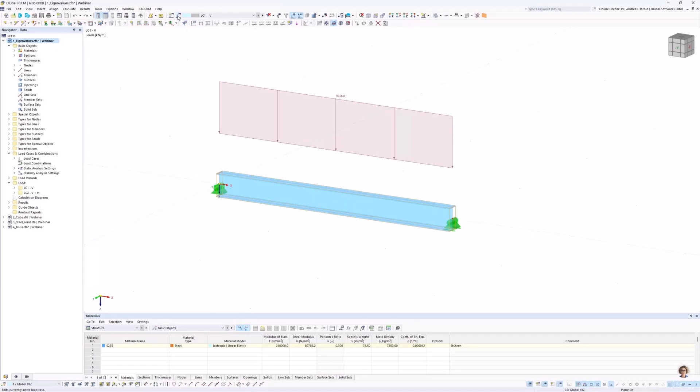Okay, then I turn to the first model and the first question is: I want to determine the critical load factors for a simple model in a structural stability add-on, but I get the error message 'too many buckling shapes required.' Why is that? Let me calculate this load case. I go to the settings before. You can see that 'calculate critical load' is checked with the structural stability add-on.

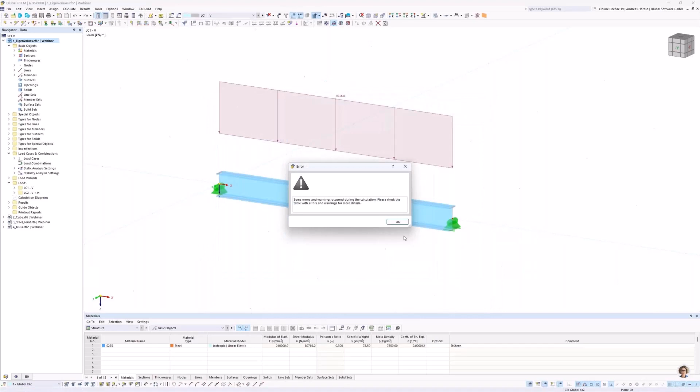Let's go to these settings. We would like to determine the 25 lowest eigenvalues. Okay, I calculate the load case. There's only a load in Z direction. So we see that error message, too many buckling shapes. The reason in this case is that no compressive force occurs in the beam, so the eigenvalue solver cannot determine any buckling shapes.

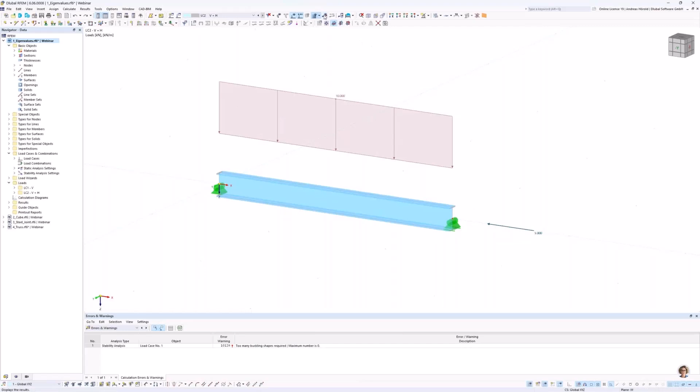Let's turn to the second load case with a compression load. We calculate it. In this case we don't get an error message, unlike the error message for load case 1. We go to the stability analysis, and left above in the results navigator we can see the different eigenvalues. Again, we can go through them.

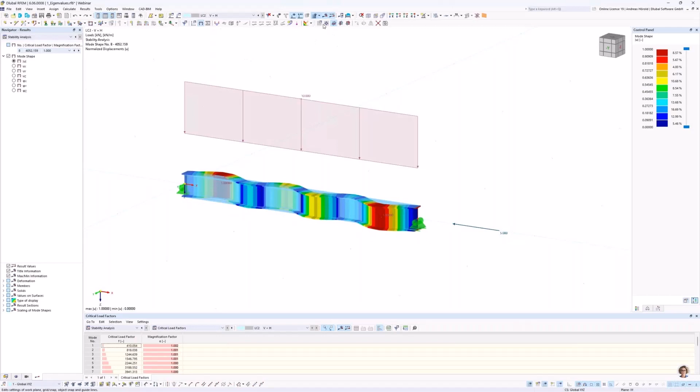But when we go to the FE mesh settings and to the members, there is a member division of 24 set, and we change the value to 2. Okay, and apply. Then we calculate the load case again. Now we get quite the same error message: the maximum number is 14.

Why is that? This is due to the mathematics used in FEM. The global stiffness matrix of the structure has a certain size, which only allows a limited number of eigenvectors, and ultimately eigenvalues. Through mesh refinement, the stiffness matrix becomes larger and therefore has more eigenvalues.

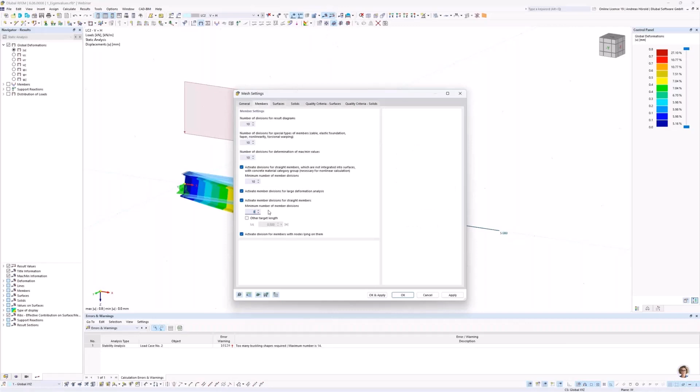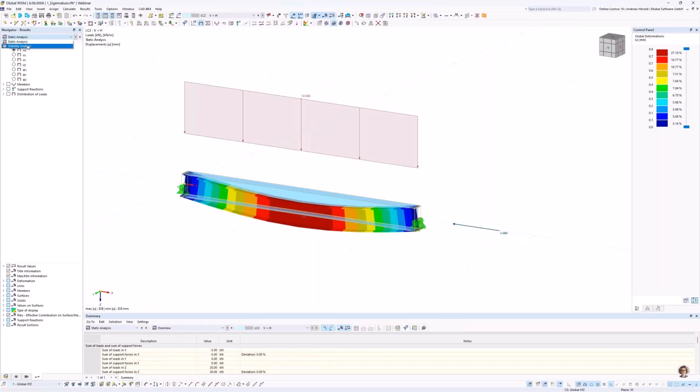Let's change it back again in the mesh settings. I enter the standard value of 8. Okay, and we calculate the load case again. Left above, we change the results navigator to display the stability analysis results, and we go through the different eigenvalues. You can see that it's not a correct or good eigenvalue because of the mesh refinement or mesh setting of this member.

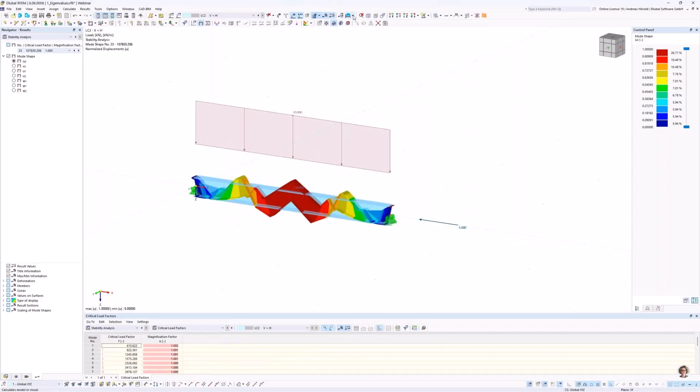I would change it back again. Sorry, here, mesh settings: 24. Okay. So after the calculation, it should look better.

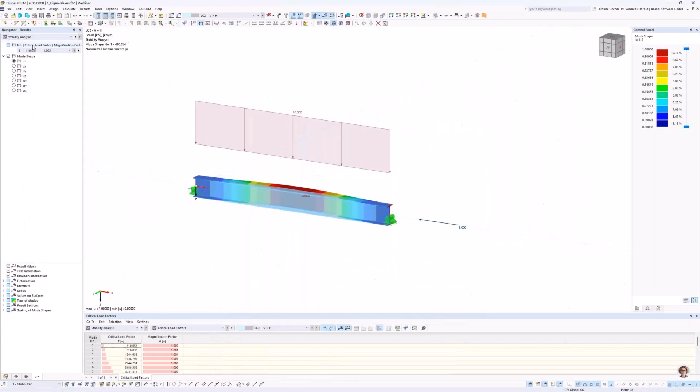Here, as in any FE calculation, let's go through the eigenvalues. Those eigenvalues look quite better. As in any FE calculation, the principle applies that the FE mesh should be kept as coarse as possible, but at the same time as fine as necessary.

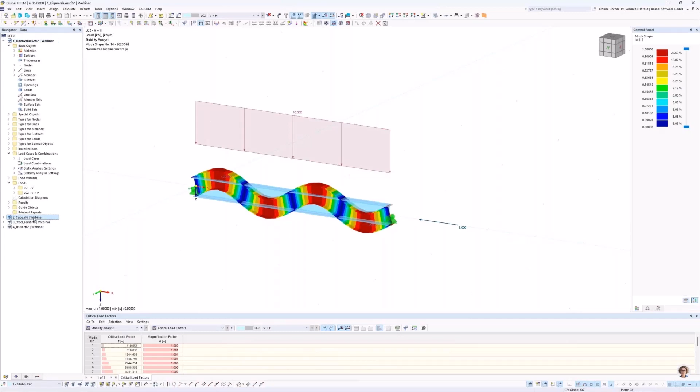Okay, so then we turn to the next model and the next question. The next question is: how can I quickly and easily insert an opening in a solid body in RFEM 6? Now, the basic shape here is a cube. We now want to insert a rectangular opening and a rectangular pocket into it. So we change the work plane into XZ.

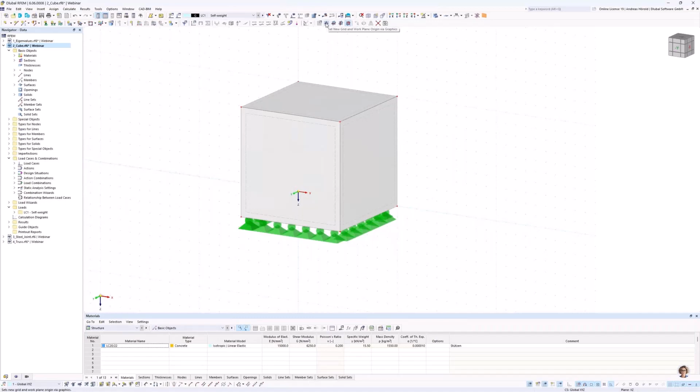With that button above, we set a new grid and a new origin. I click on that edge, so now the front is our work plane. I change to the -Y view.

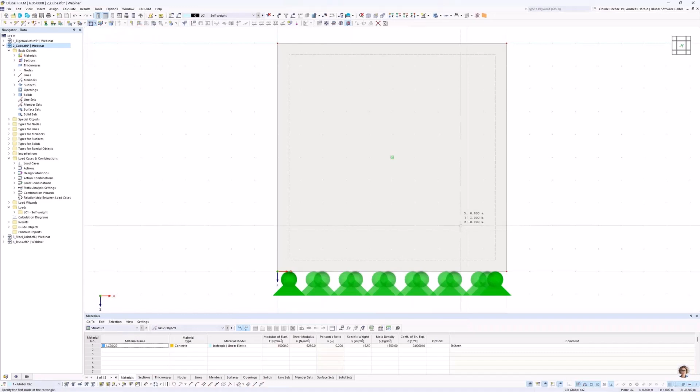So we start with the rectangular opening left above. I enter the opening, and then I would like to copy that opening.

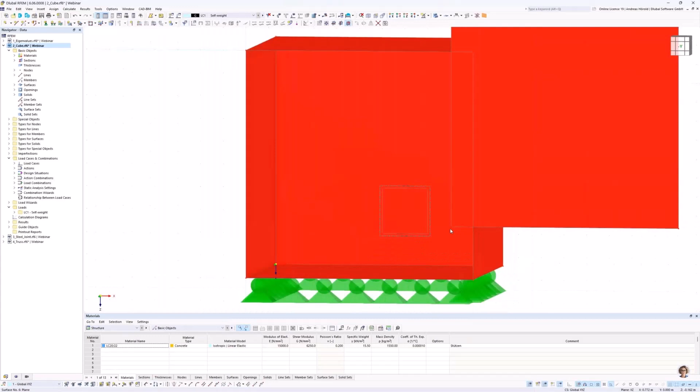Just a small tip: I would like to enter a window around the opening. And when I do that, I destroy the cube, or I drag and drop the surface. How can I avoid that?

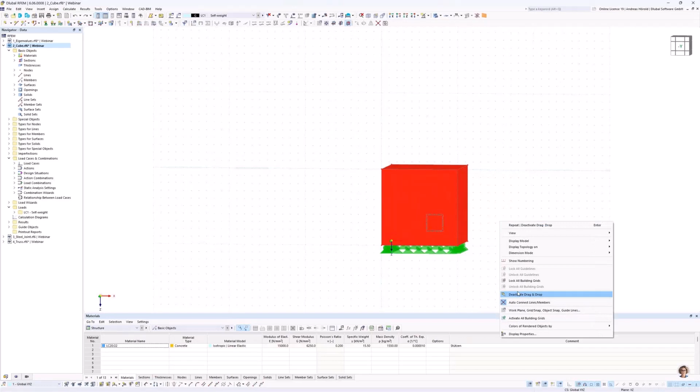I undo that. With a right click in the empty user interface, I can deactivate the drag and drop function, and then I can select the opening. Or the other possibility: I change it back, activate the drag and drop, and press the Alt key, and then I can also deactivate the drag and drop feature for this time.

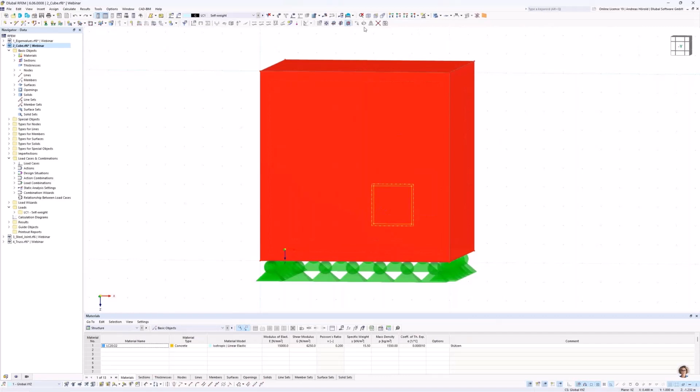Then above, move copy selected objects. I create a copy. The displacement vector should be from the front to the back. I activate the step links.

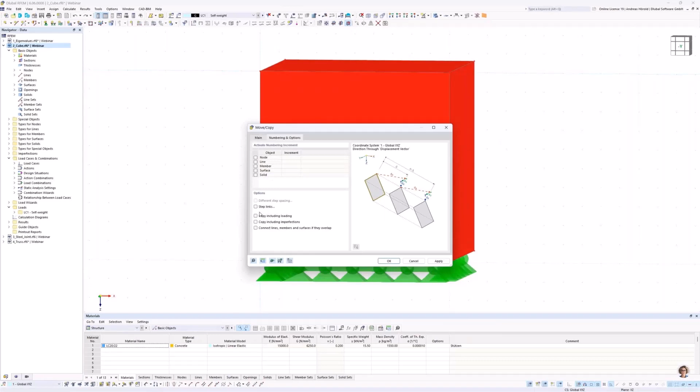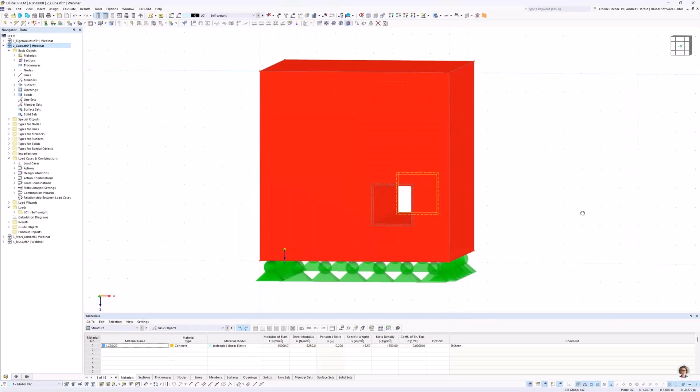Then I select link nodes with line, and link line with surface, and I have to select the surface in the graphic. I select this one. So, and that's all. And now the opening is created.

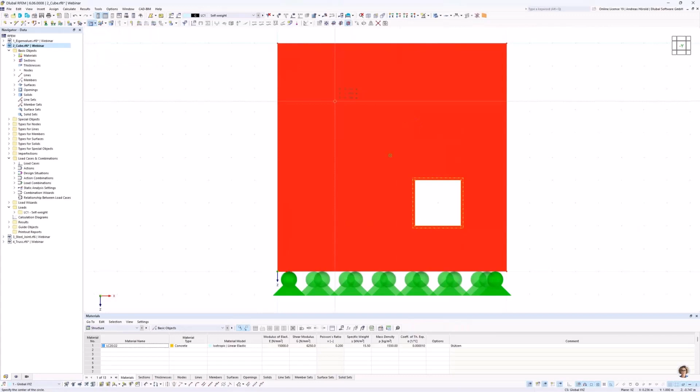So then we continue with the circular pocket, or rectangular—we do a circle. Let me search the grid. So, that's the opening.

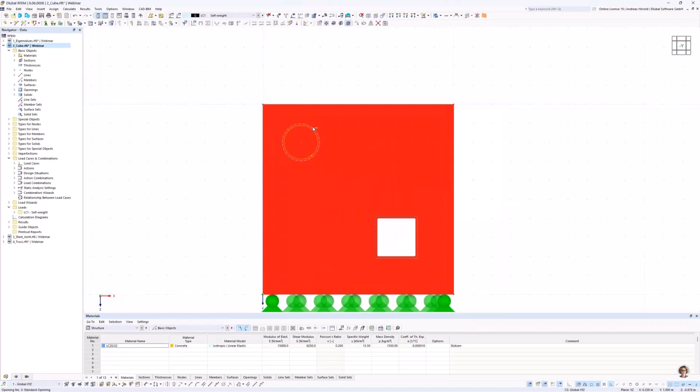Now I select all, but not the opening. I press the Shift key and deselect the opening. I would like to copy only the line, so go back to Move Copy Selected Objects. The program remembers the last entries.

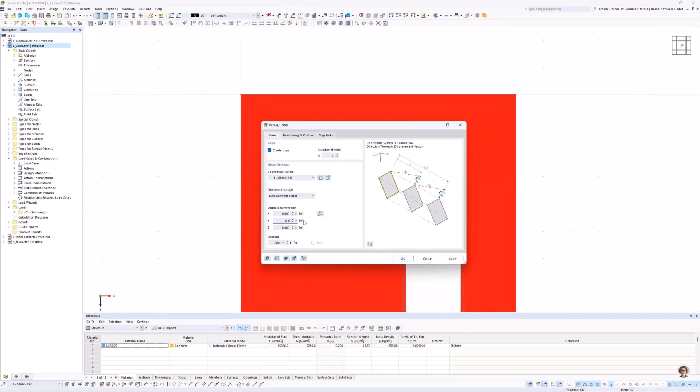So I enter 0.8 here and leave the settings for the step links.

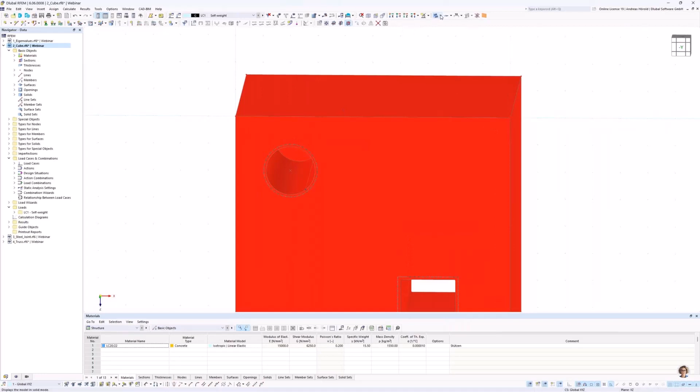Now only a circular surface is missing. I switch to the transparent model, or better to the wireframe model. And you can see there's no surface here.

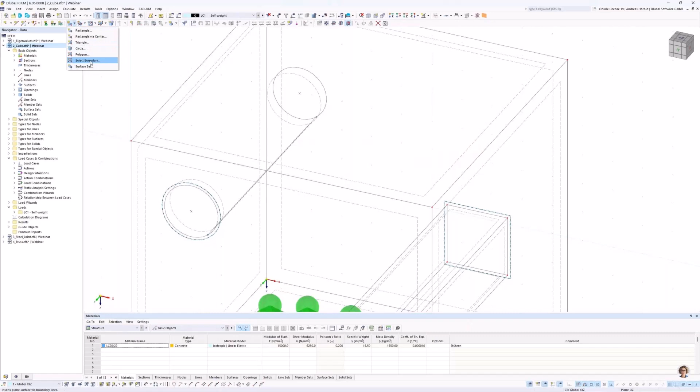So that's why I select the boundary lines and create a surface. The stiffness type should be without thickness. I select this line.

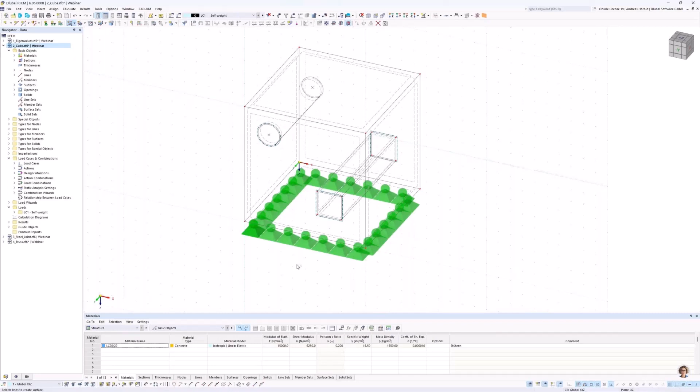So that should be all. I can go back to the transparent model. On the left side in the navigator data, you can see the solids, and now it's in red color. The solid is not closed anymore.

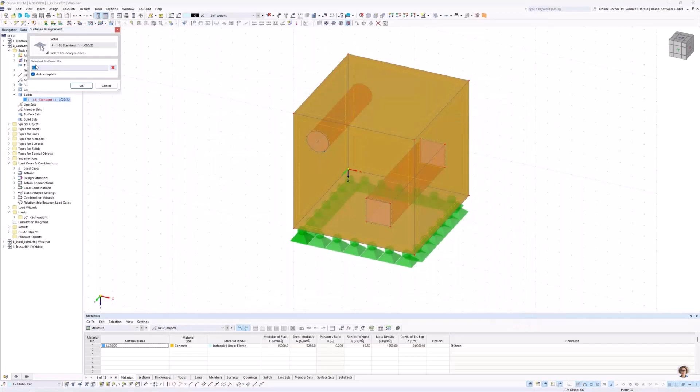So how to correct it? I double click on the solid and I have to select the new boundary surfaces. So I clear it, and select all. And now all is correct again.

We can mesh the cube. Now the solid is complete, and we could calculate it.

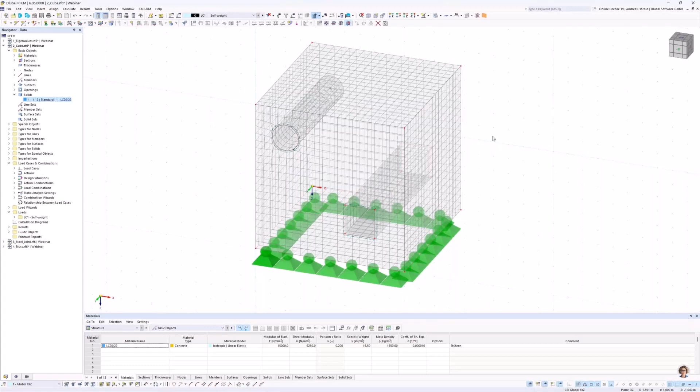Okay, then we turn to the next model. That's a simple steel connection, and the question is: I have modeled a steel connection and would like to include a dimensioned sketch of it in the printout report. How do I do that?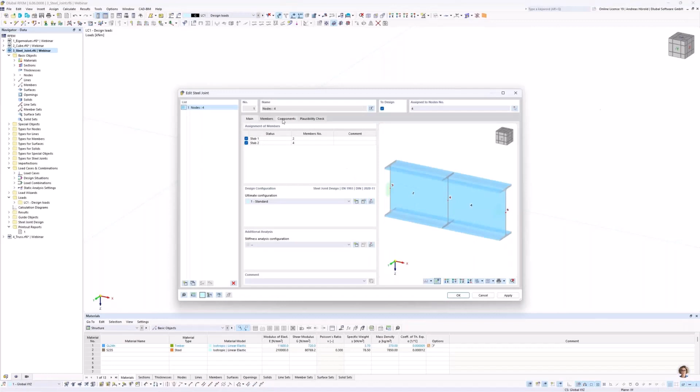I double click on the steel joint. I can see the components. So, let's go to the view in -Y direction—no, in the X direction.

And now we want to dimension the screw spacing. Now that's a quite new and often wished feature. So I do a right click in the free space, and then I can enter new dimensions.

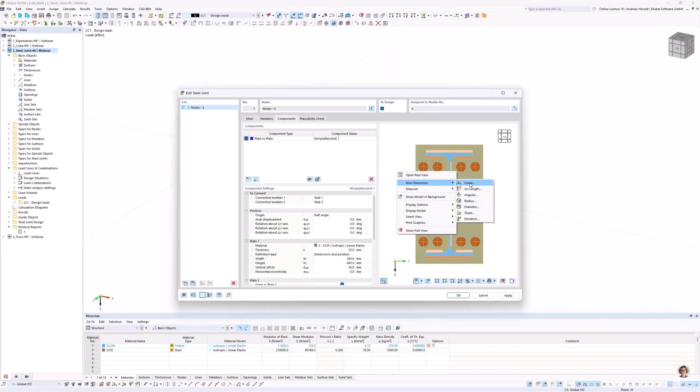Can add linear dimensions, angular, radius, and so on. I create a linear dimension, so I click on the edge and the middle of the screws. Then I choose the projection in Y direction and second plane.

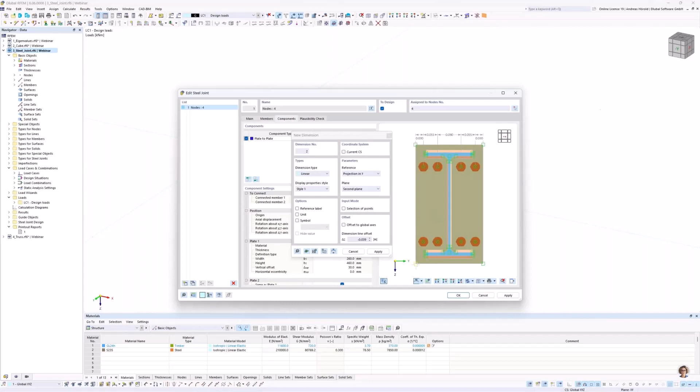So then in the next step, also the vertical dimensioning: projection in Z and first plane.

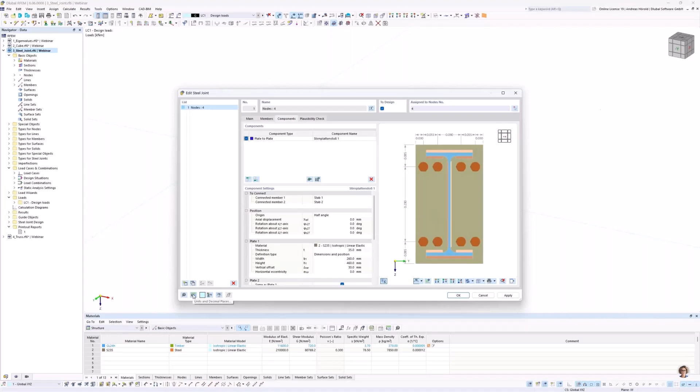Now the dimensioning is in meters. I would like to change that to millimeters. I go to the bottom left to the button units and decimal places, then to dimensions and change it from meters to millimeters, and change the decimal places to 0. Okay, that looks quite good.

We save all with the apply button, and now we can print that graphic in the printout report. You can print it directly to the printer and so on, but I print the graphics in the printout report. Now that's the preview. That looks quite good. I change it to window filling.

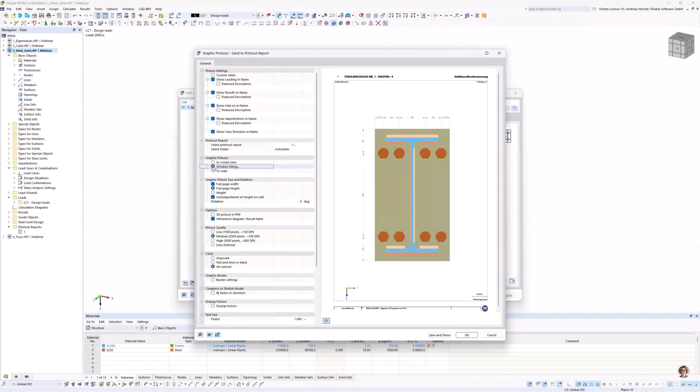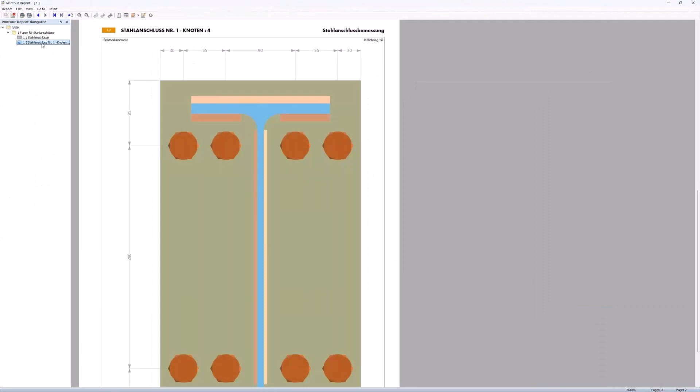Save and show, and now the printout report is creating. We can take a look in the printout report. That looks quite good. The name is still in German, but it doesn't matter. So, that's all for this question.

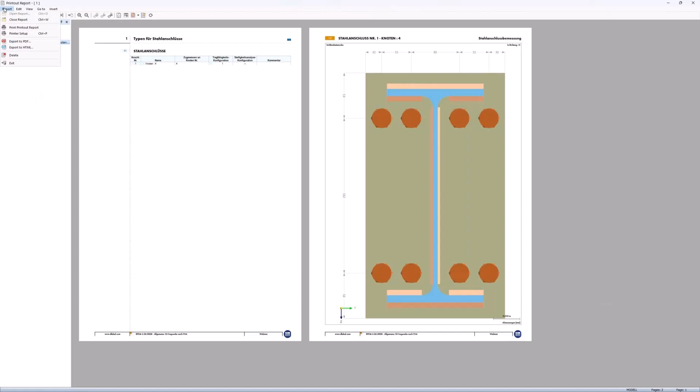The next question is, how can I share my user-defined settings for the cover page and header of the printout report with my colleagues? I go in the menu to Report and Printer Setup, and you can select, for example, header.

You can also upload your own logo, the logo of your company, for example. You can change the first line. I change it to Dlubal Software, Dlubal Software GmbH, then the address: in Germany, 93464 Tiefenbach.

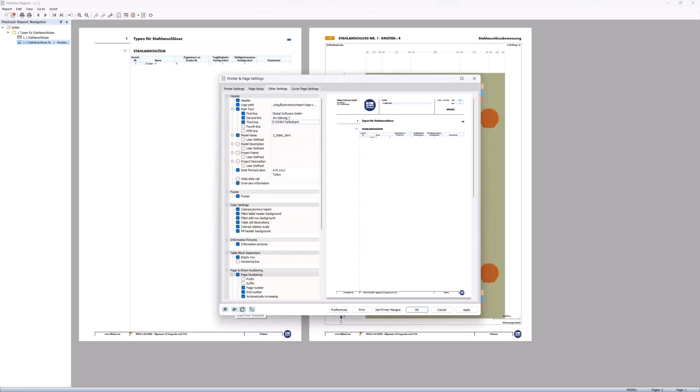Okay, and I can save that with that button, Save as Template. User-defined settings 1, for example. Okay.

So now I turn back to the program, to RFEM 6, and I go to Options, Export GUI Settings, and I deselect all, and then I select Templates for print settings. Okay.

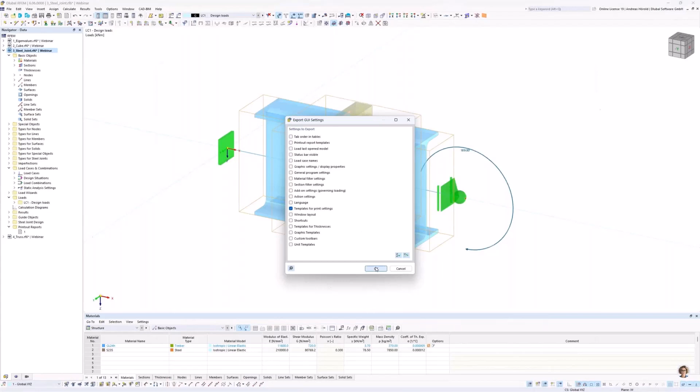And I can save it with, user-defined GUI. Save it, and then you can save or send this file or share this file on a server and share it with your colleagues, and they can import it with Options and then Import GUI Settings. Same workflow. Okay, so then we turn to the next question, or the last question.

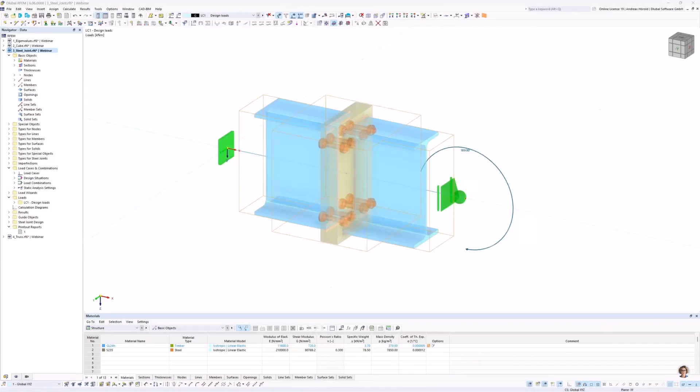Last question is, how do I best formulate my questions to AI assistant Mia so that I receive the most precise answer possible? So let's go to the website. I go to support and learning and to frequently asked questions. I search for Mia prompting.